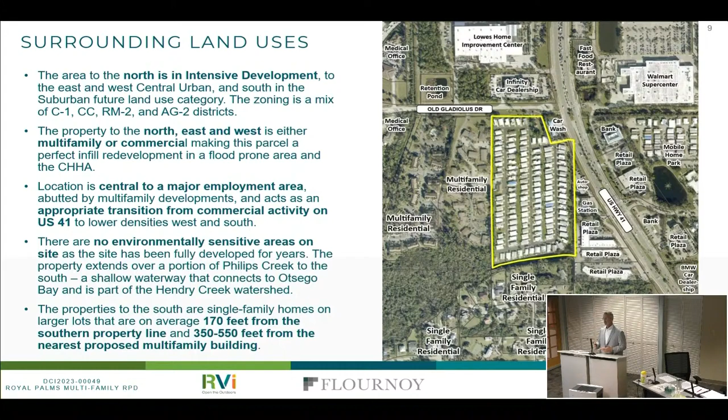So one important piece of this is the surrounding land uses. When Flournoy first came to us and talked about this project, we thought through, well, this is in coastal high hazard, so how's this gonna work? There are comp plan policies that allow for bonus density and other types of uses in coastal high hazard, but there are a lot of specifications for that, and it has to be site-built affordable. We also had to look at, is this the proper place for that? Is this a proper infill development? Is it around shopping centers? Is it around employment centers? I think we can show with this in the next slide that this is a pretty good location for this. One part of it is that it wasn't a good location for a mobile home park, as was shown.

It was built years ago before a lot of the flood requirements were there, so it's low lying. If you do your site visit, you'll see that all the other properties around it are built up to a pretty high degree, and there's actually concrete slopes on the back side of the car wash that go into this piece of property. That explains that.

I did a site visit yesterday, and it was still wet in the middle before the rain came, and I don't recall it raining the day before. So I appreciate that clarification, that was one of my questions.

Yeah, it's going to be raised a substantial amount, and we're working through that as part of a conditional letter of map revision, but also the development order. Bringing it up to flood standards is going to be an important piece of this for the resiliency and the sustainable development.

As far as the surrounding car washes, we're surrounded by similar uses for the most part. The only different use is to the south in that Hendry Creek subdivision—I think it's Phillips Court, the cul-de-sac to the south where there's the larger single-family homes across Phillips Creek. Outside of that, it's abutting 41. There's a little sliver in the corner that connects to 41, and we'll talk about that.

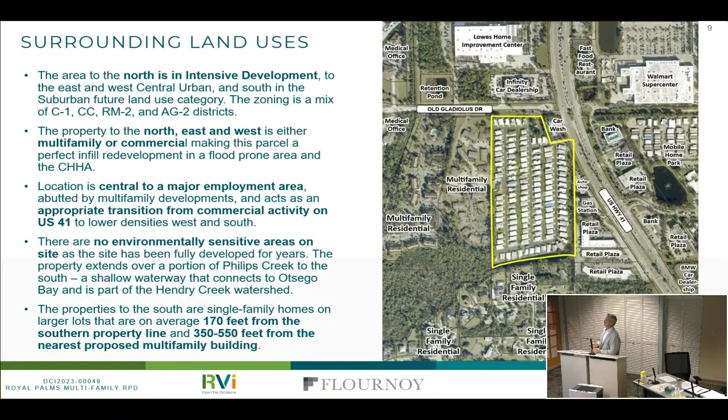One of the great things—this Lakes Park, which most people really like, what a great regional park it is—it's within that walk shed. We'd love to see sidewalks along the entire Old Gladiolus. We'll put in ours and love to see that connect to Lakes Park.

The road isn't carrying a lot of traffic, so people can use that road to get over there, but I'd love to see sidewalk connection to Lakes Park. It is within that walk shed, that quarter mile to a half mile right to a regional park.

So we believe this is a perfect infill development. An important piece of this was not only to connect to Old Gladiolus, but to connect to that employment center and that transportation network on 41. So we are actively working through a connection, a right in, right out, to connect to US 41 as that secondary access that's required by the Land Development Code for this.

It wouldn't be a pass through. It wouldn't produce traffic on Old Gladiolus with people trying to get past the intersection at 6 Mile. It would just be a gated, restricted access just for this development, a right in, right out. We'll get into that in the site plan—we'll do that next.

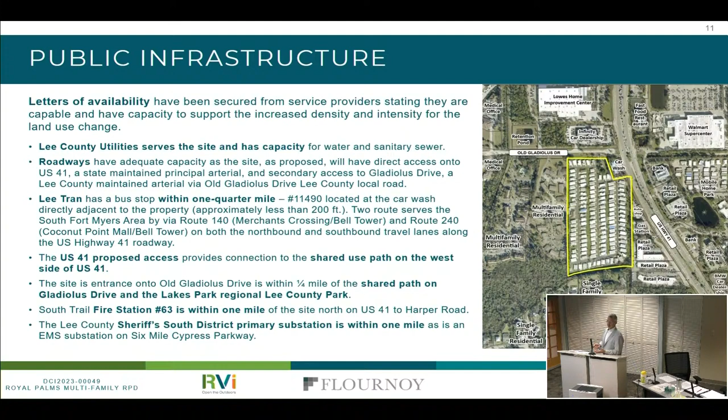The site entrance is on Old Gladiolus Drive. We're also within 1/4 mile of the shared path on Gladiolus Drive in Lakes Regional Park. Fire Station 63 is within 1 mile, and the Lee County Sheriff's Substation is within 1 mile as well. An EMS substation is within service areas, and again we have letters of availability for all of those, done for the comp plan amendment, and we have those for the RPD as well.

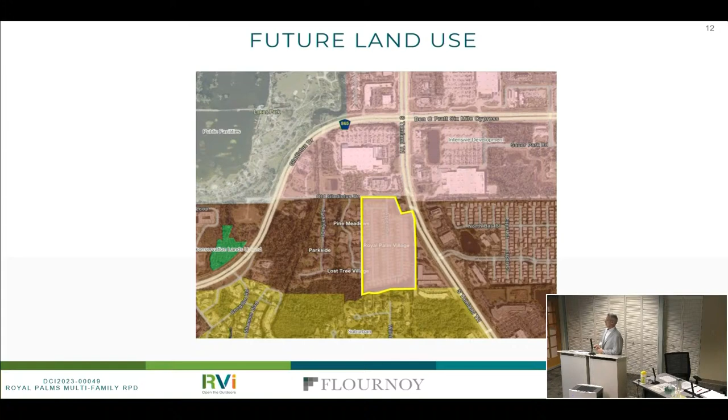Future land use has changed to intensive development, approved recently, which gives us that change. Now this is the comparison of what that did.

It was in the central urban future land use category, which allowed up to 15 units per acre including bonus density—10 units base density, 5 units bonus density. Intensive allows up to 22 units per acre, with 14 units base density and 8 units bonus density.

Because it's in coastal high hazard, those bonus density units have to be site-built affordable, or in this case, we'll use a mix of site-built affordable and the gray water legislation from the state. So it'll be environmentally sensitive for the entire apartment complex, with some site-built affordable under Lee County's requirements for workforce housing affordability.

It was currently zoned MHC2. We don't believe this zoning is compatible with the current coastal high hazard area, so we think an appropriate rezoning is to an RPD. Now we'll determine if this is the appropriate rezoning that we feel works, and we do feel this one works and is consistent with the LDC and the comp plan in every way.

Both the central urban and intensive development future land use categories encourage uses that best serve local residents and commuter traffic, including dense multifamily development, particularly where urban services are present and near employment centers. So overall, the move from central urban to intensive really allowed for that affordable part to be built, and for sustainable development to be built.

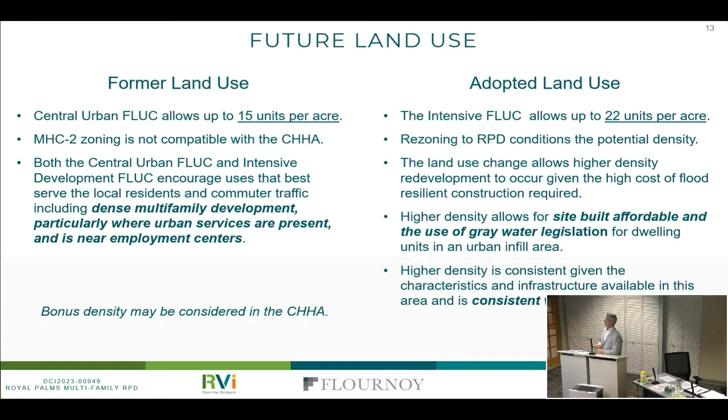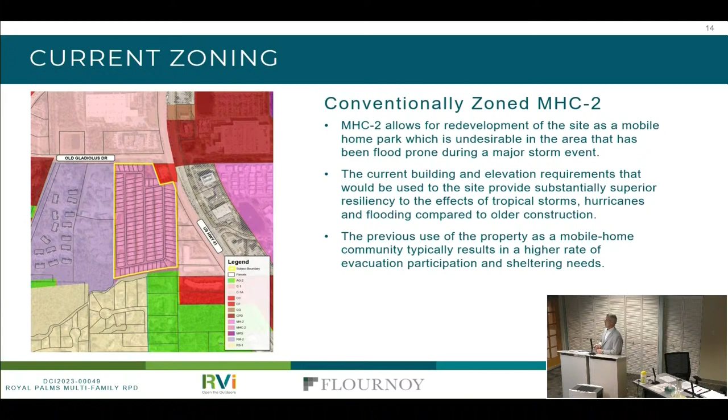Current zoning, like I said, is MHC2. It's a flood-prone area, and this will have to be built up to current flood and storm regulations. So there's the current zoning MHC2, and the proposed rezoning to an RPD.

But right now, we're only going to be going to 4 stories.

Parking surrounds it, but we pushed everything as north as we could since we needed the 50-foot natural waterway buffer. I have a slide showing where the mobile homes were before. Now with Phillips Creek there, we're required to have a 50-foot natural waterway buffer. We do intrude a little into the south and southeast end of that, and that's what we have a deviation for, just for that little bit of parking to intrude into the buffer. That does come with planting requirements, which we fully intend to meet. It was just that corner in the layout needed to make this site really work for the units we had.

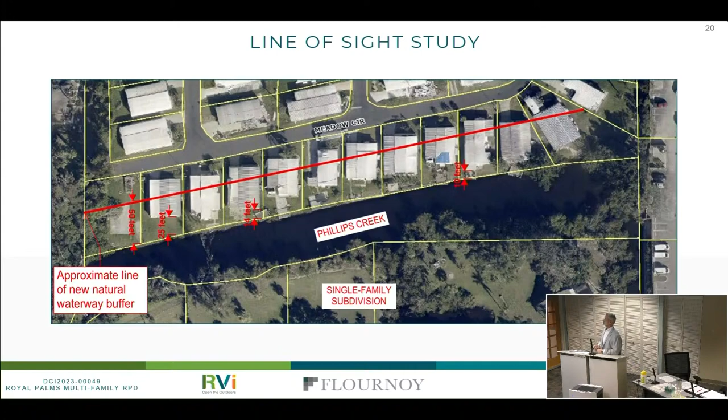So three deviations were requested. One was denied. One was in the 48-hour letter that I presented an argument for, and I'll discuss that. But we're overall in agreement with the staff report and the recommendations. Part of it's just philosophical changes I feel need to be done with the LDC on multifamily developments, but I do think there's a path if you'd want to approve some deviation. I'll go through the discussion, but we're not going to argue about that for too long. I did want to put it on the record.

So deviation 1 is for the waterway. That's the one where we're going to intrude into that little south corner with the parking lot a little bit, but we have to, and they set the condition that we still have to meet the planting requirements and enhance it a little with the littoral plantings.

Deviation 3 is for the 40% open space, where the staff took into consideration that some of our land area is Phillips Creek, and allowed us a deviation of 2.5% less required on the upland portion of our property. As a condition of that, part of the littoral plantings was to offset or help with water quality. So the denial was for deviation number 2.

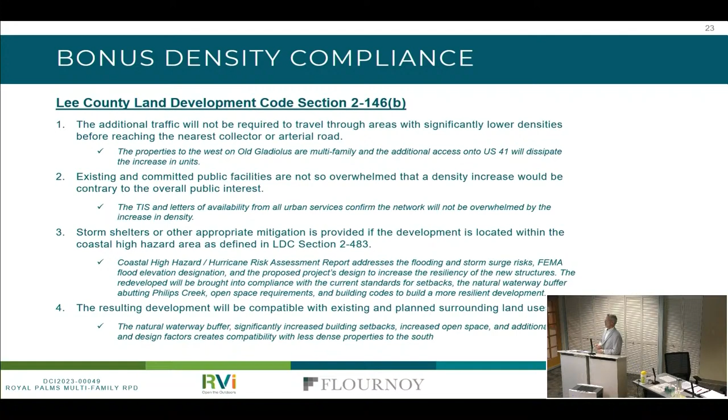So we believe it meets the criteria for bonus density compliance. And for LDC compliance, I won't go through each one, but we believe we meet this. The staff did a great job as well. Our narrative's in here broken down with paragraphs on each of these criteria. We believe we meet all these, touching on urban services, environmentally critical sensitive areas, expected impacts on transportation, sufficient access to support the development, compatibility with existing and surrounding land uses, and the other LDC regulations we believe we're in line with on this request.

So now we'll go into the life safety analysis, and I'm going to turn this over. As part of the plan, we have the water quality management plan, an emergency preparedness plan in draft form, and coastal high hazard hurricane risk assessment reports.

Those were done by J.R. Evans, and Elizabeth Fountain is here to talk about those, so we'll let her jump up here. Thanks, good morning. For the record, Elizabeth Fountain with J.R. Evans Engineering, and I've been qualified previously as an expert witness.

We performed an assessment on the coastal high hazard qualification for the site and a risk assessment based on that evaluation. Based on the LeePlan Map 5-A, as of November 2021, the area is on the outer perimeter of the coastal high hazard area as defined by the NOAA slosh model, which is a surge inundation model providing the worst case scenario. So for evacuation planning purposes, it is in the coastal high hazard area as defined by NOAA.

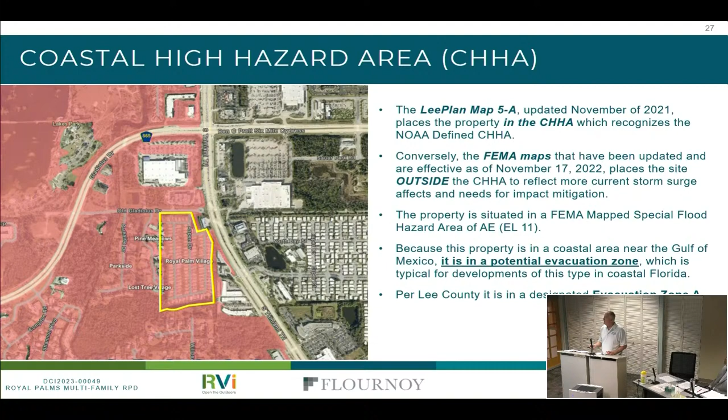Was an analysis done if that is not approved by FDOT? Did you look at what the trip generation would be if you had to push it to Old Gladiolus? No, we haven't done that because we had a pre-app early on in the process and there was no objection from FDOT, and we're in the permitting process, so we don't anticipate them denying the access. It's just a matter of working out the design details with FDOT.

So there was the proposed condition that required you to stay at 4 stories or above. I assume that's because of the ITE designation for mid-rise development. Was there any look at what the trip generation does if it changes to a lower designation? Yeah, it just changes the trip slightly.

ITE in this 11th edition broke out multifamily into 3 categories: low-rise, mid-rise, and high-rise. There is a slight difference in trip generation characteristics between those categories, not substantial in my opinion. The low-rise does generate a few more trips, but it won't create any additional off-site improvements. We're still doing the right turn lane on 41 for the entrance. There's no turn lane improvements required on Old Gladiolus at that site entrance—that's a dead-end road with no traffic at our entrance, and it doesn't connect to 41. So it might increase the project trip generation by a few percentage points.

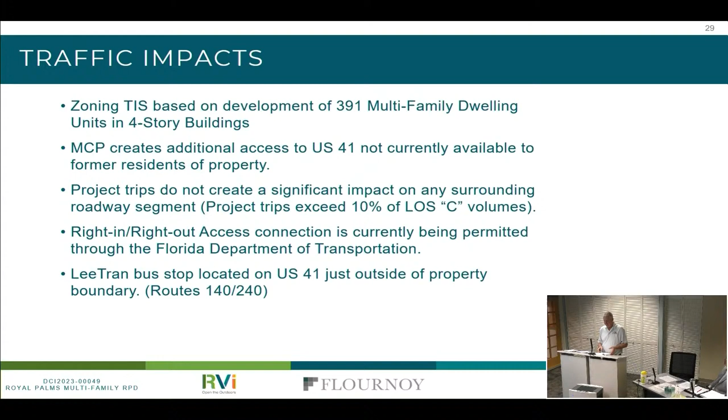That's all I had at this time. Okay, now wrap up and go into the comp plan consistency, and I'll turn it back over to Megan for the final remarks. I believe that's the order.

So it's in the intensive development future land use category, which is described as being along major arterial roads. That's the important connection to US 41, and then the service with Old Gladiolus serves Gladiolus and goes to major arterials, suited to accommodate high densities and intensities, mixed-use developments of high-density residential, commercial, limited light industrial. So the high-density residential—this is the right land use category for that.

We believe it's well located for urban infill redevelopment with all urban level services and proximity. It replaces the mobile home park that was a risk area for flooding, raising the construction to the current design flood elevations, and so we believe, and we agree with staff, that we're consistent with this Lee Plan policy.

The two I think really important ones are 5.1.2 and 5.1.3. Policy 5.1.2 directs Lee County to prohibit residential development where physical constraints exist, or require the density and design to be adjusted accordingly. This analysis is done very well by staff, and we agree with their analysis. We believe it minimizes hazards to the proposed development. The design will be required to be adjusted according to consistency with policy 2.2 and the flood zone and the property's flood zone in the Florida Building Code.

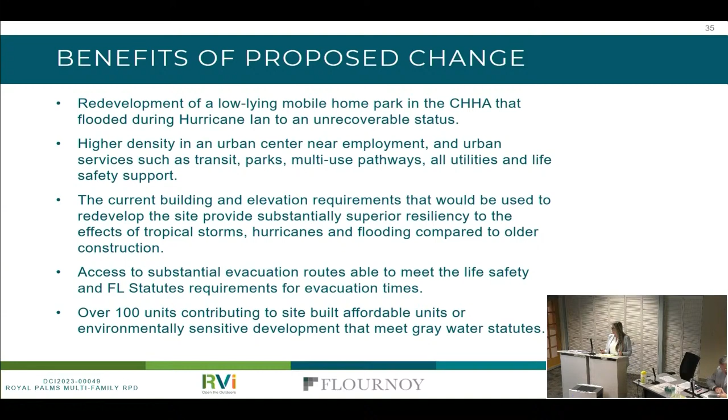Staff has recommended approval, finding that this is not only consistent with the land development code, but also the comprehensive plan. We do ask that you find a recommendation of approving this RPD for the maximum 391 units, maximum 60 feet of height, with deviations 1, 2, and 3.

We are also in agreement with staff's conditions with one caveat. The last sentence in staff's comments 6B - we just ask that the building, which appears to be confused with a development limitation dealing with ITE and transportation, stating that the building cannot be less than four habitable floors... I even still messed it up. But we just ask that that one sentence be removed, and we're in agreement with the others, but we would still request the deviation to be approved.

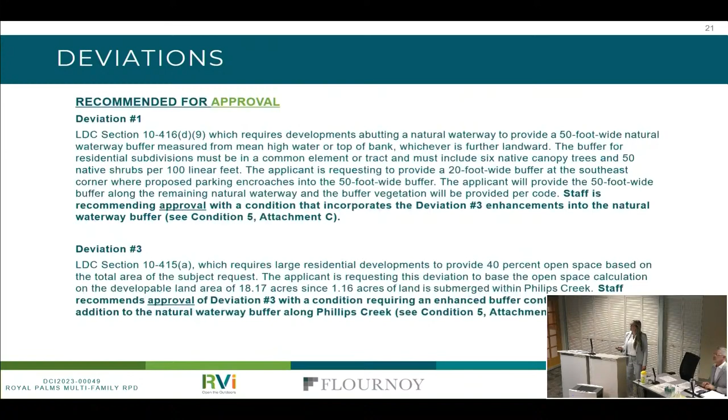Can we get the site plan, the master concept plan back up on the screen, please? And I'm not sure who to direct this to, but can someone walk through the water management system, just so I'm understanding? I understand it's going to be improved from what it was previously, but there was detail in the record and the staff report about the conveyance system that will be designed - just to indicate general flow compared to the current conditions.

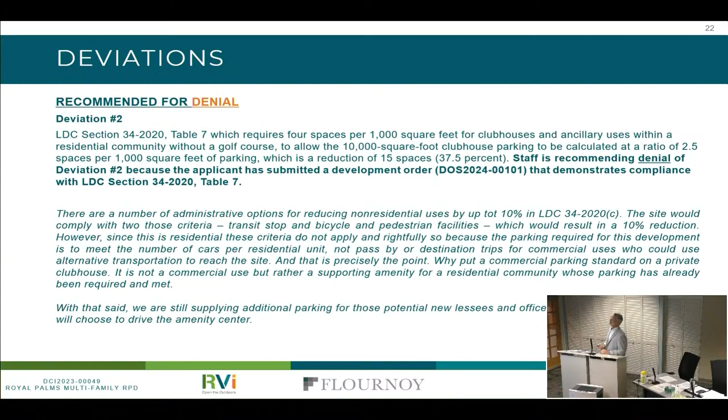Let me see where we are at. This will help me. Well, here on this side, we weren't as concerned, there's not the residential area here. It says approximately 170 feet to nearest home, but it looks like it's going to the edge of the water. Then you've got the dog park and parking areas, so there's substantial distance still, and I'm just not sure what that distance might be. If it's double, that would be in excess of 300. Yeah, to the building, yes, in excess of 350 feet.

To the parking, so we did that to not try to overdo it on that note. We measured it to our property line. But here, to the nearest parking areas, it's another 50 feet for that measurement, and then to the nearest building it's another 51, almost double that.

And on the line of sight exhibit, it did show some significant vegetation. You talked about the buffering. Where will that be exactly? Because you've got that drainage access easement, can you plant within that? Not the natural waterway itself, but adjacent to that, you've got a drainage and access easement location to be determined at time of DO. I don't know if that would prohibit planting. That's a maintenance easement for Lee County to reach Phillips Creek and do things if they need to.

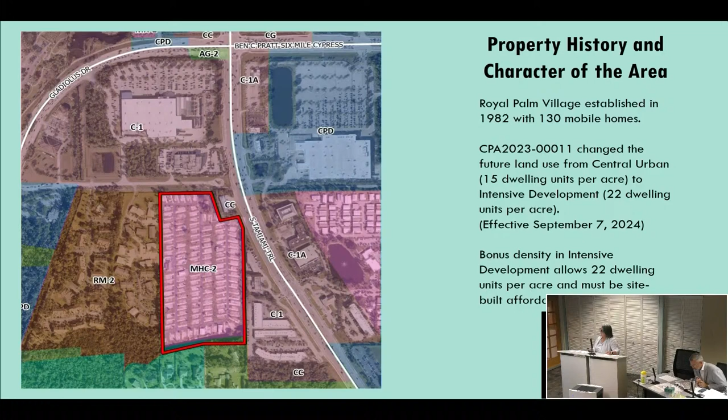So looking at the surrounding land use categories, the intensive development is located to the north, which consists of commercial and medical offices directly across the street. So you have the Infiniti dealership, you have medical offices in this region, and then you have access to the Lowe's located right here. Across the street, you have the Walmart shopping plaza with the out parcels.

Central urban to the east and west consists of multifamily and commercial. And then suburban to the south consists of single-family residential homes directly abutting Phillips Creek on half-acre to 1-acre lots.

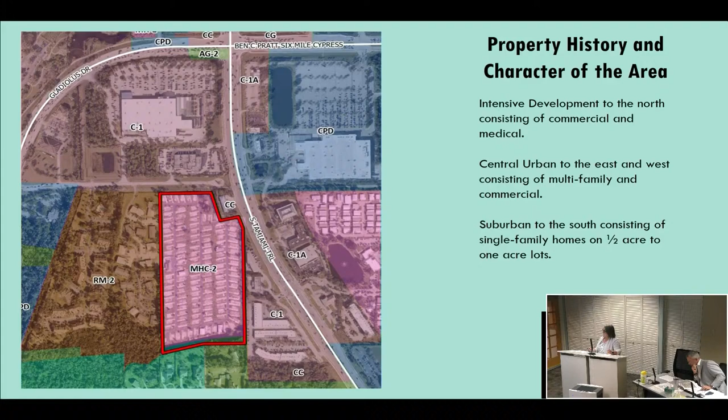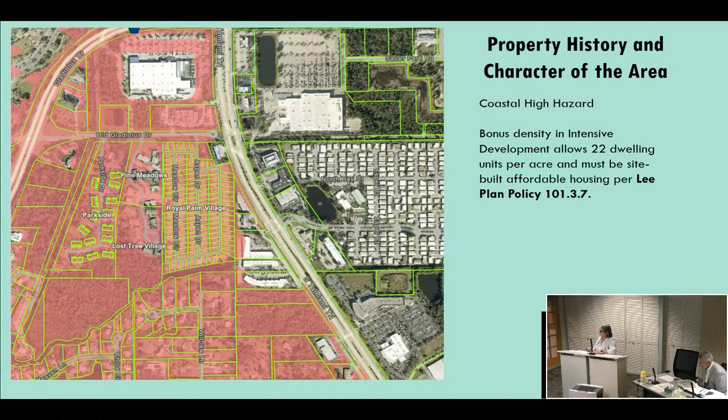It is in the coastal high hazard according to the Lee plan. So it gets confusing between the state FEMA coastal high and the land development code Lee plan coastal high. This map shows you what the Lee plan, the comp plan, shows as coastal high, and the requirements within the coastal high hazard when you're going for bonus density is to construct site built. So they have to construct those additional units on the site.

Development location and timing, the applicant went over these policies in 5.1.3, 5.1.2 thoroughly. And the public facilities in 4.1.1 and 4.1.2 of the Lee Plan, all of this is in an intensive development area. It has sewer and water.

It has access to bus stops, as you see kind of shadowed in here. It has EMS and fire. This is also Lee County Sheriff's Office up in here. So it has access to all the public facilities.

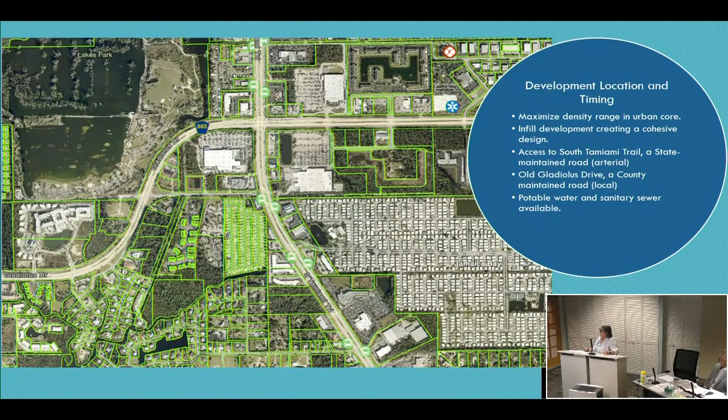There were letters from the school board stating that though they don't have capacity in the school choice zone, they do have capacity overall to accommodate any families that move in here with children. So it does meet this criteria of the Lee Plan.

Lakes Park Regional, Lee County Park is down Old Gladiolus Drive, as the applicant pointed out. The Lee Tran bus stops, it is kind of an expressway along there, so the stops are frequent to get people to and from work or shopping centers.

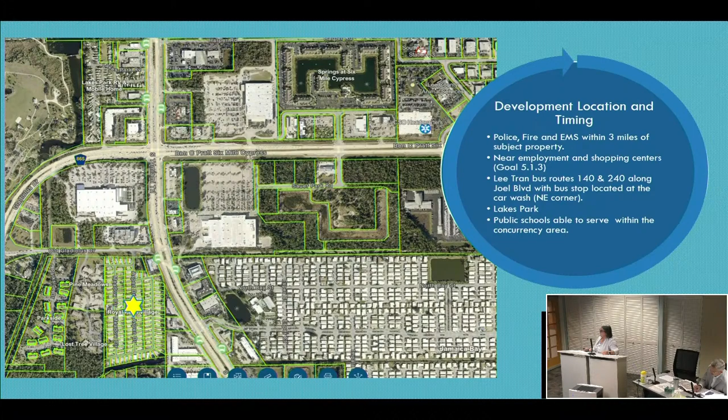Another thing I want to touch on is the housing element. So policies 135.1.9 and 160.1.3 ensure a mix of residential types, uses and designs, looking countywide for a diverse workforce. So this looks at countywide in this region, not just the subject property.

The applicant went over this thoroughly. There are multifamily dwelling units to the west that lead up to Gladiolus, and then you have the single family to the south, large acre lots, and then you have the mobile home community. Jamaica Bay is across the street. So you do have this diverse area for residential, but then you also have a diverse workforce.

So you have the retail settings up in this area. There are medical offices. There's a larger shopping network with Target and things like that to the north, as well as to the south, some various places of employment.

Looking at policy 5.1.2, this prohibits residential development in areas with physical constraints or hazards, which in the Lee Plan gives examples of flood, storm, or hurricane hazards. As was mentioned, the mobile home park that had been in existence since the 1980s was critically damaged.

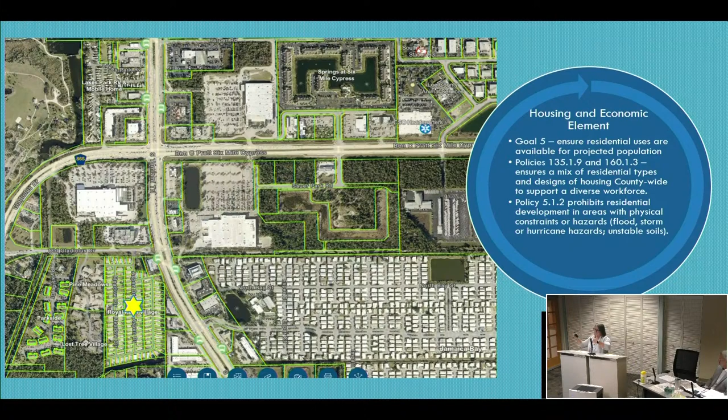So in doing this development, the setback for the actual development footprint for the parking and multifamily units will be set back further than what was there in the past, because of the 50-foot natural waterway buffer. In that buffer, which I'll touch on shortly, you can have plantings and passive recreation. We also have additional conditions for water quality because of the impaired waters there. This is an improvement to help with mitigation toward storm impact. If water levels rise on Philips, you have that forgivable space of the 50 feet with the natural waterway buffer - that's why it's in the current code today.

So the traffic, which Mr. Treese touched on - the level of service in the overall surrounding road network ranges from a C to an F rating, with or without the proposed development. So if this doesn't go forward, you still have these roads at a C or F rating, but with it, it would remain the same. There still needs to be some improvements on the surrounding roads, but the project doesn't provide a detriment to that.

The proposed two access points stated are on Old Gladiolus as well as FDOT 41. The Old Gladiolus Drive access point will be reviewed at time of development order if it needs any off-site improvements to support the level of development on-site. We don't do that at time of zoning, because during the development order process, you have engineer drawings and everything shown to scale, so you can see what's going on off-site. Old Gladiolus and Gladiolus Drive leading up to Lakes Park is a signalized intersection to control traffic flow in that region.

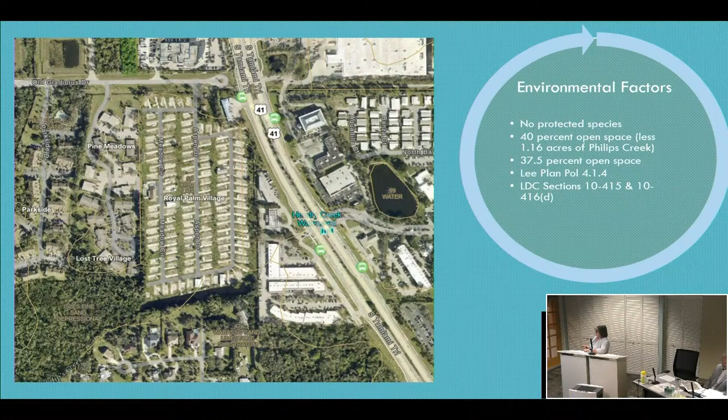So the deviation that came in was a 37.5% open space requirement, which is the reduction of that 1.16 acres, because when you start dealing with all the different percentages it gets kind of confusing. They're providing the required open space on the upland portion at a 40% rating, 37.5% overall. That's in line with Lee Plan Policy 4.1.4 for protected species, stormwater, and water quality to enhance the site.

Going through buffers, along the right-of-ways, you have a sliver of right-of-way right here, and then the right-of-way here. The applicant is required to provide a 15-foot wide buffer, so nothing can go in there, no structures. In that 15-foot wide space, for every 100 linear feet there are 5 trees and a double hedgerow, along this area right here.

The 50-foot natural waterway buffer is located in this region. You are allowed passive recreation as long as it doesn't trip a 20% impervious threshold, so the concrete in there doesn't trip that 20%, per the land development code. But in this region, every 100 feet there will be 6 native trees and 50 native shrubs. I want to touch on this access point for natural resources.

The code requires a 20-foot access that has no vegetation in it, because they need to be able to get a vehicle in there if during a storm event this gets blocked, and they need to go in for health and safety to remove the blockage or maintain this. It also allows the community to maintain what they own along that shoreline.

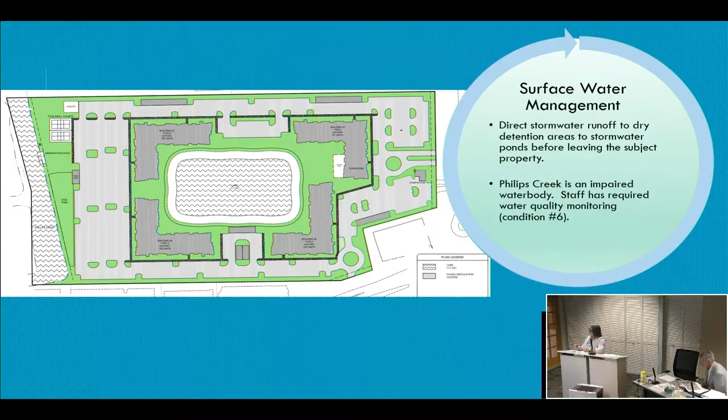So the deviations we went over, there are 3. The one that's being denied is number 2. I've explained the 50-foot natural water, and I've also explained the open space that is equal or better, because we're providing an enhancement along that shoreline.

Deviation 2, the code section recognizes that there are no golf courses. There are no large amenities being proposed. It builds that into the code. That's why this applicant has to follow that code, because it's saying that without golf courses, you need to follow this part of the land development code for the parking provided.

In the deviation justification, it was mentioned that it's over parked. Well, no, because we have a requirement for your use, and then you're adding this amenity which looks at off-site parking. If you're going to have people over and utilize the amenity center, what does that look like? Is that going to be over park? You're going to have people parking in areas. Yeah, you have guest parking, but that might not accommodate for what you're doing.

So we have to look at worst case scenarios when we look at deviations, unless there's something given to us that allows us to know exactly what's going to happen in that amenity center. Yes, it's built into this unit, but what's going to happen? Are you going to have just a weight room, so it's all internal capture, or are you going to have something else? We don't even get into that because of worst case scenario.

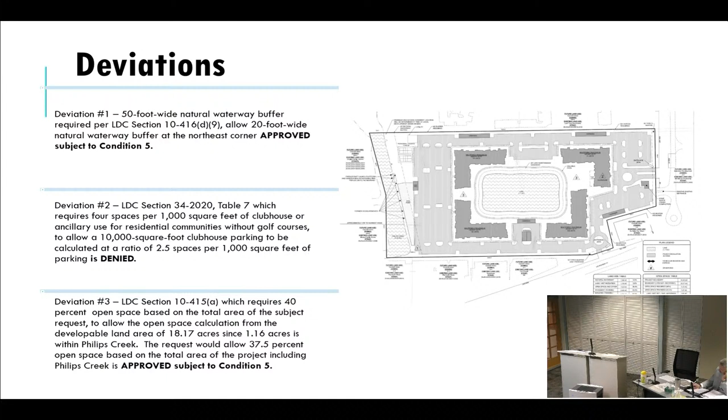Thank you, that'll be staff exhibit 3. Do we have a DO number on here? Yes, at the top in red. DOS 2024-0, is that a 1? I believe it's 101, yeah, I believe so. I can look that up, I can double check that. Thank you, I got cut off so it's not clear to see.

But yes, thank you. So during the review of this deviation, the applicant submitted a development order that shows less units, but it does show the parking being met. So then we were like, well, is this really necessary, this deviation? So without any additional information, we cannot really entertain deviation number 2, and we have to look at worst case scenario.

So when an applicant comes in and is requesting bonus density, the criteria in LDC section 2-146B must be met. The applicant described all of these really well. And the additional traffic, you want to make sure that if you're proposing this multifamily, do all the residents need to travel through a lower density area? They do not. There's Old Gladiolus Drive, with a mix of commercial, medical office, and then the multifamily to the west. The existing and committed public facilities are not overwhelmed. No, they're not. This is an area that has all the services needed to support multifamily.

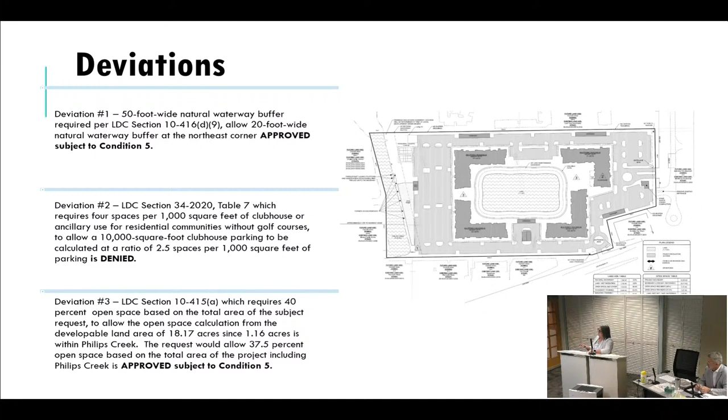Right now, as it stands on the master concept plan, there is a drainage area that runs along this area that gives access. There's no buffer required between these two, so there is room, if need be, to come in here and go this way. That's how staff reviewed that from that perspective.

As for surrounding land uses, to the north you get into more intensive commercial uses, and then the arterial US 41 with Jamaica Bay across the street.

In conclusion, through the PowerPoint presentation, staff finds that the applicant has provided a consistent Lee Plan and land development code, has provided a master concept plan and supporting documents to demonstrate compliance with the Lee Plan and land development code, and is consistent with or compatible with surrounding land uses as it pertains to traffic, environmental sensitivity, and the emergency plan for the increase in density. So with that, staff recommends approval with the conditions.

On the 48-hour letter, staff is in agreement with everything but the deviation number 2 changes, the striking of the four habitable floors. I wanted to verify that with Development Services that they were on board with that, and they were. I have my PowerPoint presentation for the record.

I also have a letter that was mailed to me from Ms. Whitmer. She's the association president for Parkside Place Condominium Association, which is to the west of the subject property.

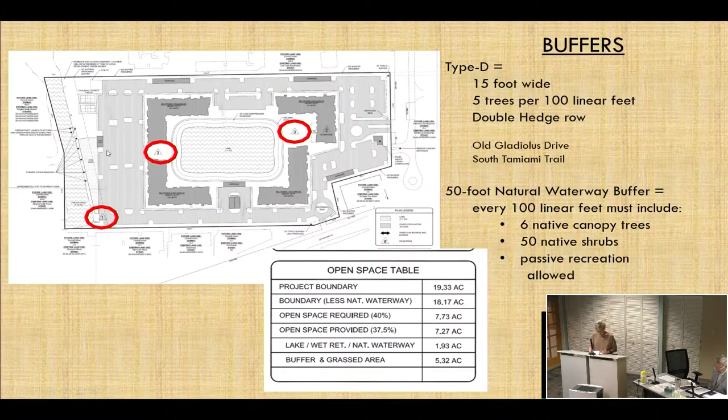So basically, those are my concerns, and I think I've talked about a bunch of the same concerns that we share. I hope we can come together as a team and figure out what is best for our community, and obviously would love to have this property developed in a way that would benefit the community, but also protect those that are already there, from flooding, so that it's a place we can all live together.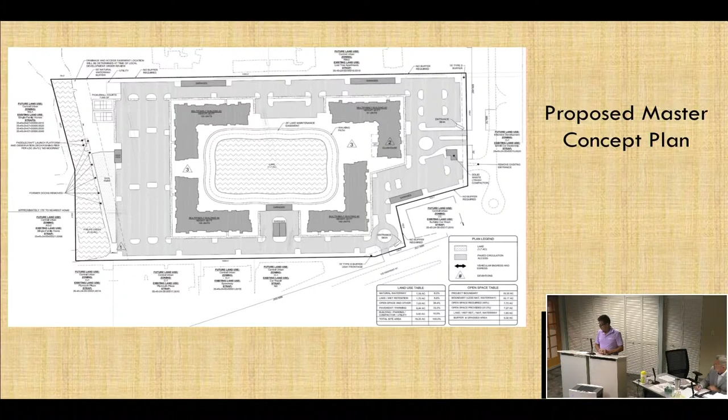My name is Tim Kendall. I reside at 15291 Willow Lane, which doesn't show up much on the maps because I'm covered by trees. But I'm going to be at that part where it's closest to the development. I've got pictures showing where they say the closest house was X amount of feet, but that wouldn't be my house, that's going to be the ones in Phillips Creek. Mine is literally about 170 feet from the buffer zone. So that's going to be me, right there.

And I'm going to be the anomaly here because I'm kind of on a peninsula, surrounded on three sides by water. The lagoon comes into my front yard. I've lived there since 2002, never had any issues with flooding until recently. Obviously, Ian did us in as well - I had 5 feet of water in the house and a fire the next day. Still rebuilding today. The anomaly part is the sympathy for everybody across the canal, because my mother was over there.

So I kind of have stuff on both sides. She's been with me for the last two years because obviously nothing has happened and she can't move on, and it's kind of hard at 76, retired, with nothing to show for it. And I own that property with her as well, so I have my name on both sides of the canal.

Obviously the number one concern is still going to be the flooding. I have pictures of what's happening now just after a normal rain. The flow going through Phillips Creek - I don't know the last time the county's ever been in there to do any kind of cleanup or dredging. We contemplated trying to get everybody together to do it ourselves, to no avail. After about 2 or 3 years, it just never happened. So since the storms, if the flow isn't already there, it has nowhere to go.

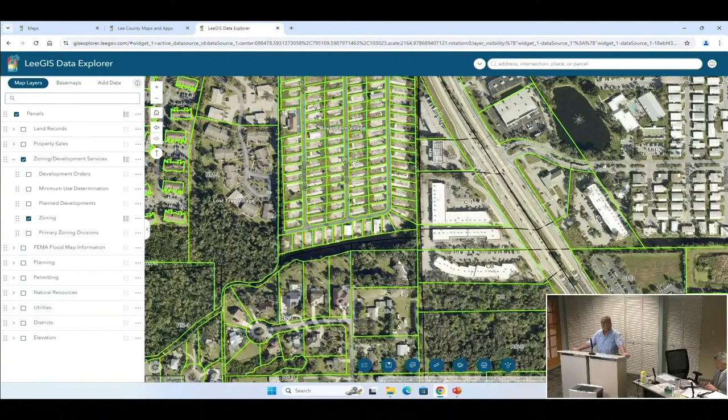Good morning, my name is Eric Farmer. I currently live in the North Fort Myers area, but I was a resident of the park. It was a community we all loved, we all got along well. We had great respect for our neighbors behind us and feel for their concerns about rising water. We all tried to get together and find ways to dredge the canal. That's really not an issue concerning this project as I see it. That's something the county needs to address, and we've tried to get them to do that in the past. I'm hoping you'll support this positively, as our neighbors will also agree, because this gives us an opportunity to move into the future of Fort Myers and Lee County. It also presents a great opportunity for those of us who lost everything. The only thing I didn't lose was my wife's life and mine. I'm now back to work full-time. I went to 5 different places to live in a year and a half before I could find a place to permanently live as a result of Ian. Ian devastated a lot of people, my neighbors included. I urge you to support this so that we can have a phoenix rise up from the waste. Thank you.

The last card that I have is for Don and Kathy Goddard. They left, okay. Was there anybody else who did not submit a form yet that wanted to speak today?

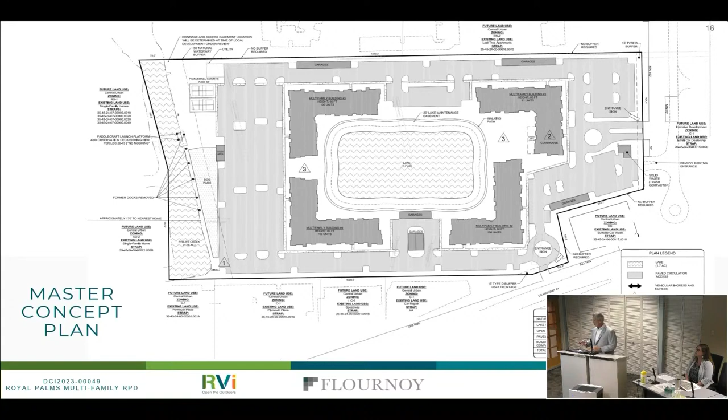All right, last thing we want to hit on is the line of sight. So just to let them know, one gentleman said he has a 2-story house - did we take the line of sight from there?

We did not. What we did was take a person standing at the edge of their backyard and looking towards the buildings - you can see that on some of the aerials. So we took it from a person standing here and standing here. The actual house is another 50 to 75 feet further, at that distance, to their actual house. We could probably run a line of sight from the house itself, but the distance would be even greater, and we think we're at a pretty substantial distance away from the building. So we did our best we could on that, but that's how we measured the line of sight.

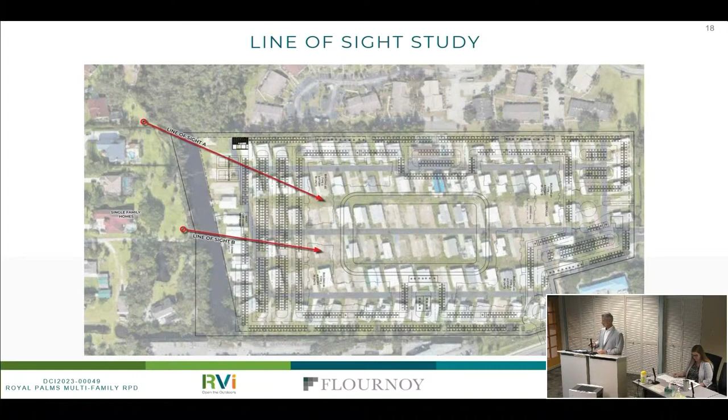And with that, with the one less story, with the plantings that are required here, as Beth mentioned, and the natural area required on this side as well, I think it's hidden pretty well for this being a higher density development against single family neighborhoods. We've seen much worse than this happen, so I think this is a positive way that this is coming out. Like I said, we did as well as we could on this one. That was trying to address that concern, not trying to refute it, but just letting them know how we did that and what that exhibit actually tries to show.

But to clarify, that exhibit is showing 5 stories, and you're reducing it now to 4. So essentially on each, you would see the top floor. From, if you were standing at the edge of your property line closest to the creek - if they were back at their house, it'd be a little bit less, depending on the vegetation - but yes, that's correct.

There were some other things about Phillips Creek. We'd love to see the dredging and the long-term maintenance take place - that helps everybody in the region with flooding, and it sounds like a lot of the flooding down creek may be part of that issue. I don't think this site, based on what the experts will say, the way it is now, there's quite a contribution with a bowl and flat surface runoff with no water control whatsoever on the site now. So in a lot of ways, to meet modern standards of water control, we'll have to substantially change that sheet flow that's happening now. Based on the requirements we have, they're quite stringent, and we have to meet all those for this type of development. So I'll let Elizabeth get into that.

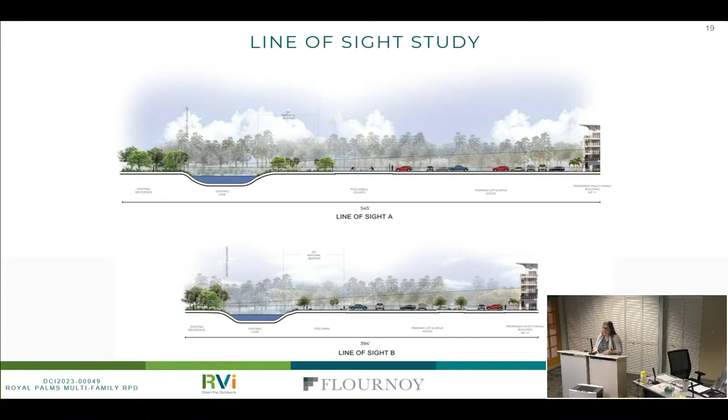The proposed development plan does include a controlled water management system, and it's deceiving when you look at the plan. The proposed lake is centralized, and in the parking areas and even within the green spaces there's a collection system designed with grate inlets and culverts that are all interconnected. They take the runoff water to dry detention areas and then eventually to the lake. Those dry detention areas are small, shallower ponds that provide additional water quality treatment—we call it pre-treatment before it goes into the lake for additional treatment and storage attenuation.

The lake level is based on a normal control elevation, or seasonal high water elevation for the property, which is directly adjacent to Phillips Creek. It's based on the mean high water level for that creek. The banks on the sides of the pond are at least 5 to 7 feet higher than the elevation of the water—that's how much storage is in that pond. So it's really hard to tell on a flat plan view, but there is a significant amount of storage in that pond.

And the way it gets to Phillips Creek is through a control structure, which is a concrete structure designed with minimum sized openings to allow water to discharge. Only at a certain elevation does the water get to a point where it's even allowed to go into Phillips Creek, and that opening is sized to only let out a limited amount of water over time. That's all being permitted through the Water Management District, and then Lee County will also be involved through the development order process.